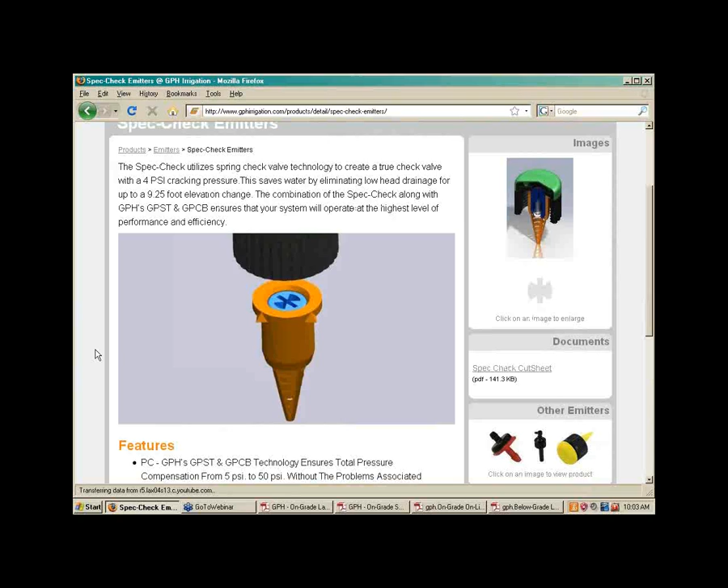We have a new product that we introduced a couple months ago. It is actually the same emitter, but with a check valve built into it, and it's actually a true spring check valve, and it has a 4 psi cracking pressure, so it'll maintain 4 psi in your line at all times. And this has a couple benefits.

The first benefit is it eliminates back siphoning into your line, which is the number one reason that emitters clog. It isn't necessarily the water quality as much as it is any debris or dirt that actually gets sucked back into the line and then finds its way to the emitter control element and ends up clogging it there.

So that's the first benefit of the checking system, but also it saves a ton of water. It actually eliminates the loss of water to low head drainage. It's kind of one of those things where as irrigation managers, we're not necessarily concerning ourselves with how much water it takes to fill a system before we start using that water for irrigation.

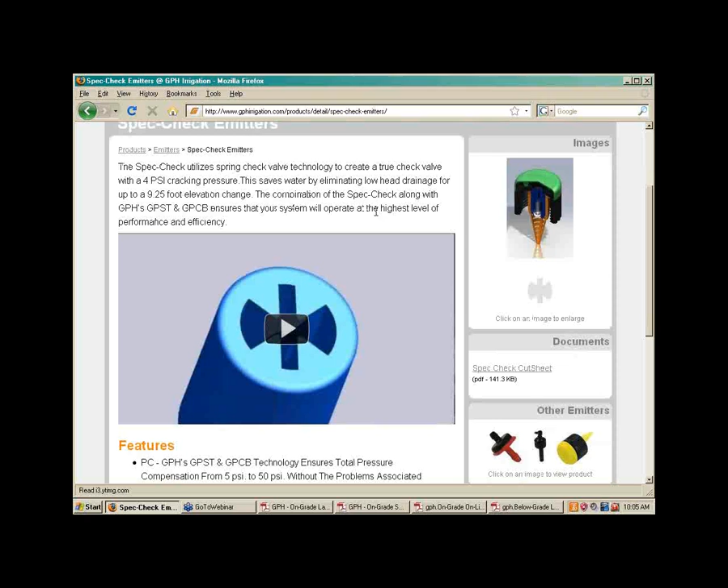And it's significant, especially in commercial applications. It's difficult to put a quantity on an average system, but it's 10 to 20 gallons on a small commercial system, and even more obviously on larger systems. So it is a significant amount of water on every single cycle that's saved.

Another product that we're really known for is our flexible PVC hose and tubing. This is a really heavy wall product. It solvent welds just like regular PVC pipe, so it doesn't require any special fittings. It's available in 1/2 inch, 3/4 inch, and 1 inch standard Schedule 40, Schedule 80 fittings. The only difference is we recommend using IPS 795 solvent cement, and as far as the welding techniques, they're identical to standard welding techniques.

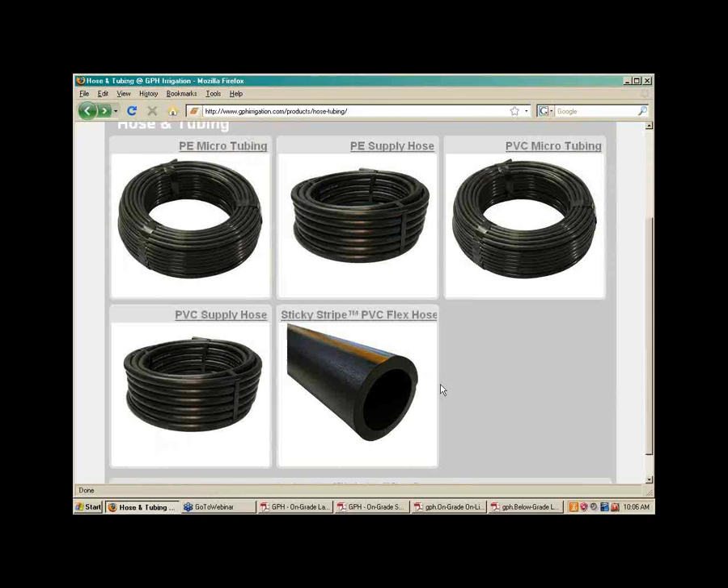We have a brand new product we just came out with, we call it our sticky stripe, and in the picture it's a little bit difficult to see. I'll enlarge it here, but this orange stripe is actually a high viscosity PVC, so it actually acts as a catalyst when solvent is applied to speed up the solvent breakdown of the plastic before it's introduced to the fitting, so it provides a much better weld.

In a perfect welding situation where the installing contractor uses just the right amount of primer, the temperature is perfect, and his welding techniques are perfect, it's gonna provide an equally strong weld.

But anytime one of those variables changes, where maybe it's a little bit colder than the solvent's recommended use, the lack of primer, or maybe the solvent is a little bit congealed and older than it should be, the sticky stripe is really going to ensure a proper weld.

Of course we don't recommend installing the product that way, but in the real world we found that it's pretty common where guys with 20 years of experience are still kind of trying to cut corners sometimes in the gluing process.

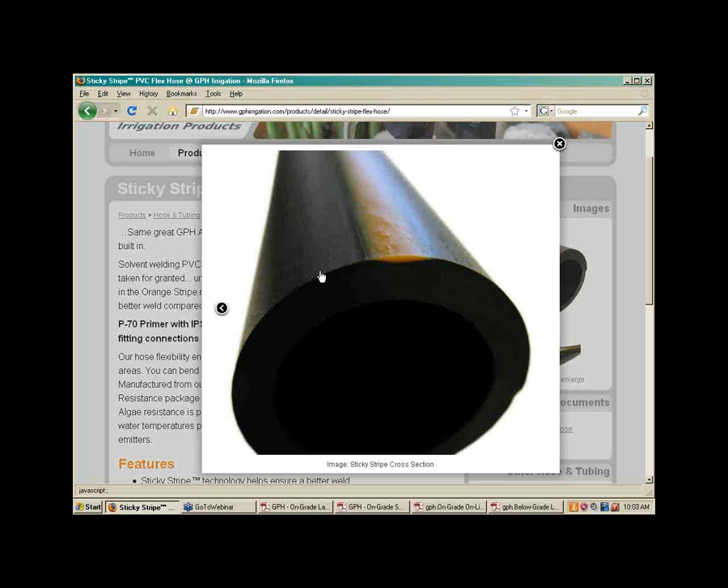Here's another picture of the actual stripe, and they're 180 degrees from each other. So with the twisting action, it does kind of wipe that catalyst around the whole diameter, or circumference, of the hose.

We do manufacture a full line of drip products, so we have stream bubblers, high flow bubblers, and the micro bubblers as we call them, with the half inch thread, also available with the check valve. We have standard emitters, which we call single outlet emitters.

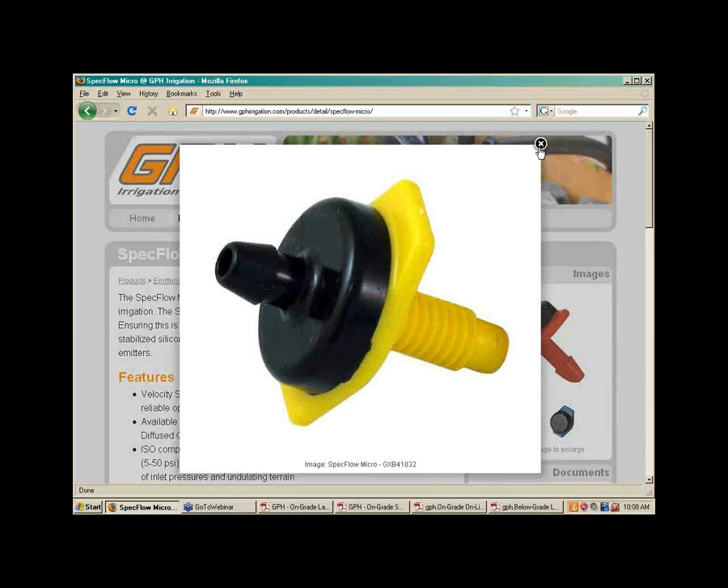We offer these in a few different configurations. We have them with a micro threaded inlet, so you could install them on rigid PVC pipe or high density polyethylene pipe. We also have them designed with a diffuser cap, so if you want to put these right at the plant's root zone, it helps eliminate some back siphoning, but also keeps bugs from crawling into it.

A unique feature about our products is that all of our emitters are available in camouflage, which kind of sounds a little gimmicky, but in high-profile projects we found that quite a few architects and irrigation designers like the ability to have the product above grade and still have it blend in nicely with the landscape.

We offer them in a desert camo and a mulch camo. The desert camo is matched with a kind of desert gold rock that's really popular in the Southwest, even down to the little silver sparkles that are in the rock.

And then our mulch camo, pretty much straightforward there, it matches regular mulch ground cover. Again, the camo colors are available in all of our emitters and bubblers. That's unique to our product line.

We do manufacture standard polyethylene style hose that is pretty common to regular drip applications. Our prices in the marketplace tend to be a hair lower than the Rain Bird and Toro Netafim offerings, but we are specifically focused on landscape irrigation, and really the focus of the company is on quality.

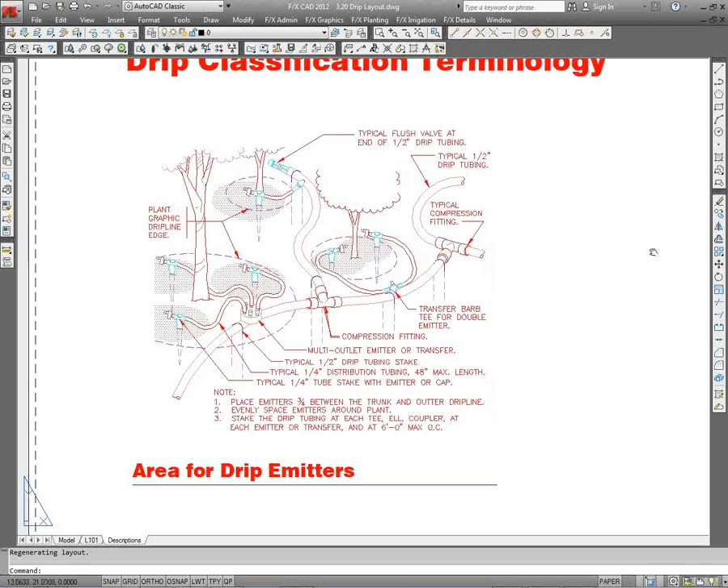What this is basically showing is I've got this above grade stuff. It does have staking — here's what the staking is, here's typically how I'm putting these emitters. In other words, in this little example, the emitters are on little stakes of some sort.

That is what we call area for drip emitters.

Another way to do drip emitters is individual emitters. Commonly in the desert, Palm Desert, Vegas, that sort of thing, the sun would eat up alive any above-grade stuff, so you hard pipe. This case it's showing some flexible riser with an emitter at the end of it. However, the hard piped version Travis was showing would be, in my mind, a way better solution, because while some people use this little flexible pipe, I think bad little children could come along and really whack them up and cause damage.

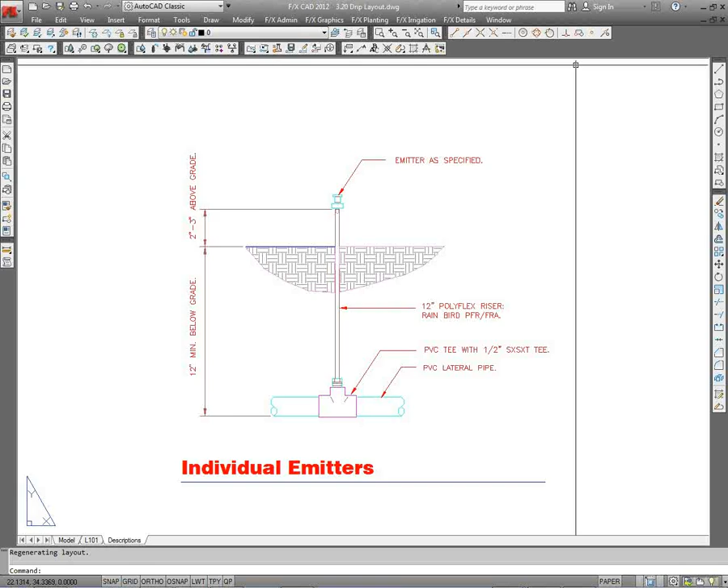A hard pipe would be a much more Cadillac kind of system, and the hard piping does appeal to me. So that's another way, individual emitters, where you're going to see a symbol for every single emitter, and I'll add some of those in because you can mix these up. It could be that you have an area for emitters, but within that area you specifically want to show some individual emitters, and maybe even pipe them separately, or not pipe them separately, but this is a different way to show it.

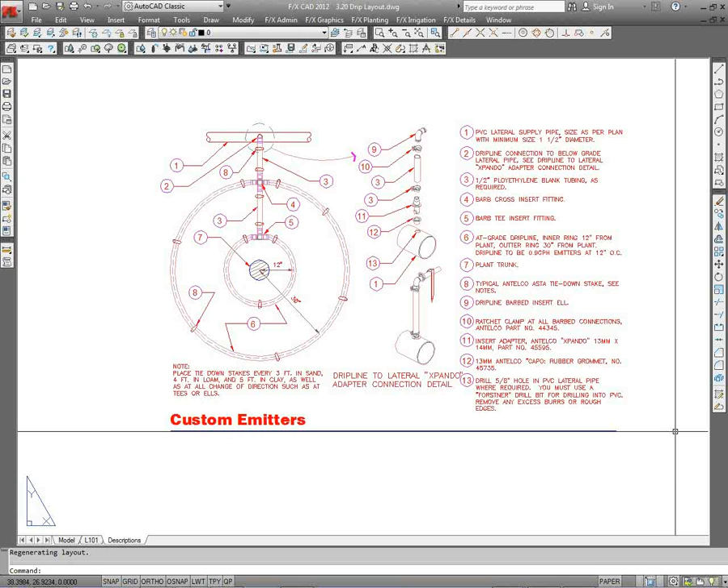So if you add a custom, you assign how much GPH you expect from it. I think you would associate it with a detail, which would be your custom detail like this, and it will give it a unique symbol. So you can use custom.

So we have area for drip emitters, we have individual emitters, we have individual custom emitters, and then the last thing we have is drip line, which is very different than individual emitters. There's built-in emitters along the line, and you space those uniformly within the project.

Other things I'm going to be adding here, just to keep our terminology squared away: a drip control valve, which is, in my mind, really kind of like a kit. It's a combination of valve, filter, and pressure regulator all in one, and we call that a drip valve kit. We do not allow or have built into our system the option to say, I want this particular valve, this particular filter, and this particular pressure regulator—it gets wildly complex.

However, if you have a drip system with really a large amount of volume, and you want a bigger valve that simply is not offered, that's fine. Go to regular remote control valves and add, let's say, even a 1.5 inch valve, and you just add it and then edit its description to say it's going to have this filter and this pressure regulator.

So you can transcend above—I'm going to add a GPH filter and pressure regulator, but since they don't make the valve, it's going to have a valve that they recommend could go with it. Or you can add from another manufacturer, this kit basically here.

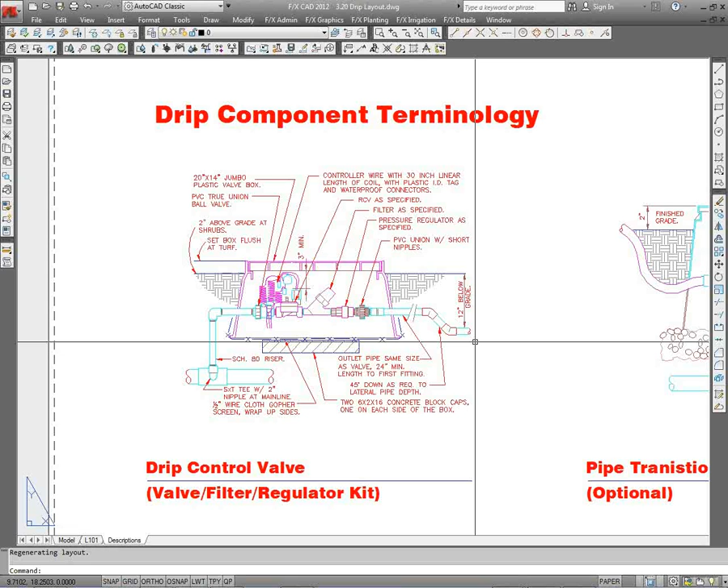But you see this pipe is leaving the valve below grade—it doesn't necessarily have to. I think that's kind of typical because you have a valve and your planted areas are not always conveniently right there where the valve is. There could be individual planters off to the side, could be islands in places. So typically I find it more convenient to leave that valve underground and then pop up occasionally.

And what I call transition to above-grade piping—there's a couple of ways you can do a transition. We call this a pipe transition point. You can show these with Land F/X or not, that's your choice. I like showing them because this first one here is kind of expensive.

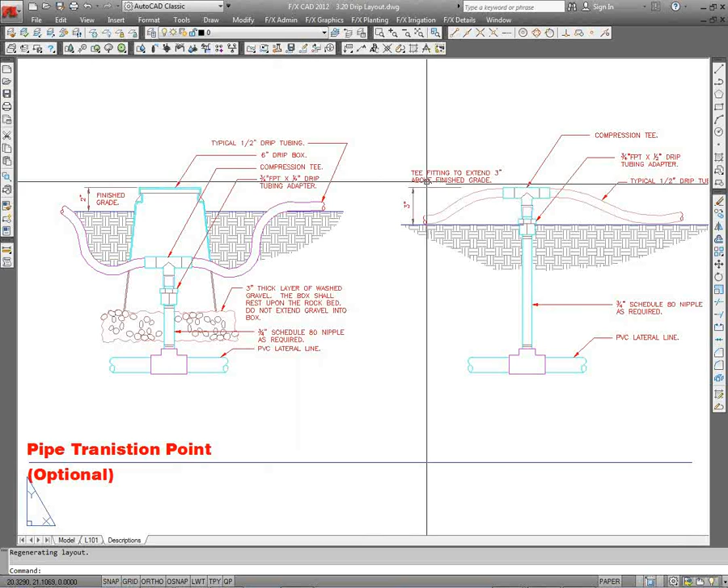It's in a box, it has some gravel. The idea is that if these bad little children come along and destroy the irrigation, they're only destroying the amount that leads to this one leg right here, hopefully, before somebody chases them off. So the maintenance people can go back to this location and rebuild it without having to rebuild everything.

So I tend to show them where I want them, maybe 30 or 40 feet apart, something like that. But you don't have to. Just to keep that terminology in, we call that a pipe transition point.

Somewhere, somehow, there's a flush valve at the end of a drip thing, so you can open it up and flush out the debris. That's your choice. You can add a flush valve and get a symbol for it and place them on the drawing where you think is most appropriate, so you're assured they're going to be in the system.

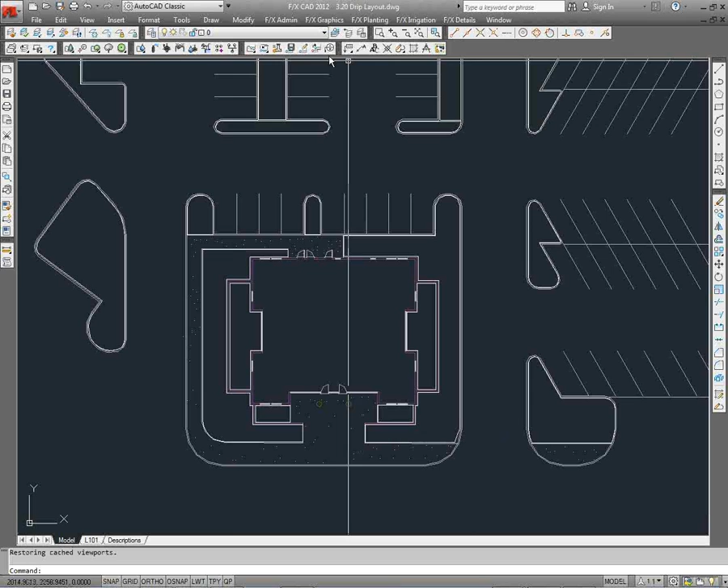A drip air relief valve is probably not necessary unless you're using drip line, and some drip line that's above grade doesn't need an air relief valve, but that's part of the terminology.

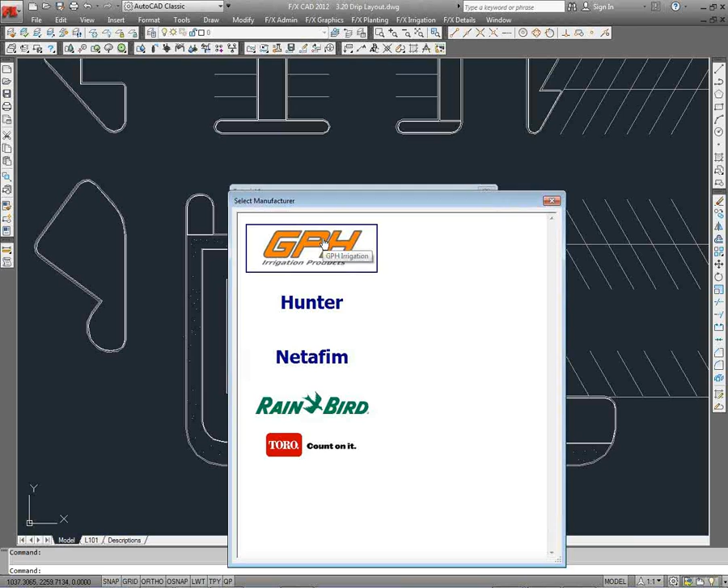So let's add some of this product in there. I've started a project, I'm going to go to the manager for irrigation for that project and go over to drip. I've added one thing so far, that pipe transition point. I just went to that category, and let's look at the categories. Here's pipe transition point, but you can add a control valve or any one of these things.

So let's add a control valve. I'll go ahead and say add. There's GPH and other manufacturers that have control valves for drip. They actually have a couple going on here, but they're not really valves - it's really using the GPH filter and pressure regulator with a valve.

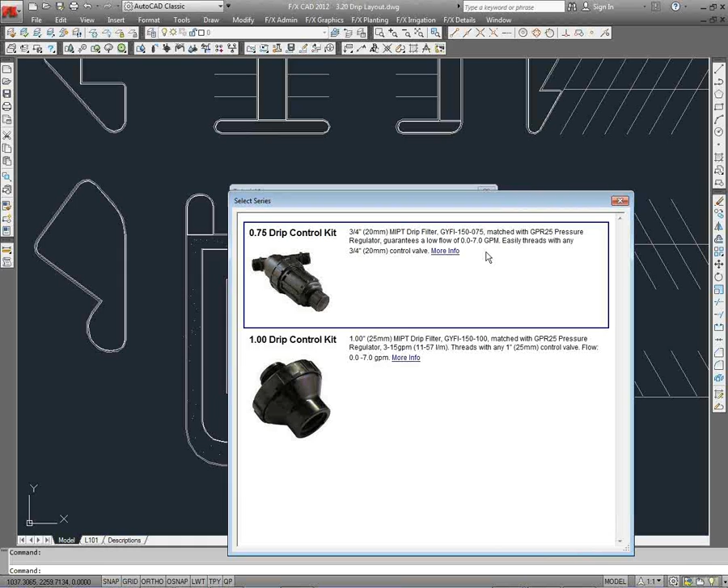I'm going to go to this 3/4 inch just to see. Well, let me go back for a second and add that again. Now you can see it's from 0 to 7 GPM, which is the flow range. Anytime, anywhere we're listing a drip control valve, we like indicating what the manufacturer indicates as the flow range. It's not really the valve, it's the other equipment attached to the valve that might have this limitation, so it reminds you of the flow range in there.

I know we were tinkering with this yesterday in its description, but GPH doesn't make a control valve, so they recommended the Irritrol 700 or the Rain Bird 75 DV. So we're putting in one of those products with the GPH filter and pressure regulator. I'll pick the Rain Bird. Say add it - so I've added the drip control valve.

Now let me go add another product. We've added the transition point, and you can add a flush valve. I'm going to pretend we did, sort of - I'll just beat through there.

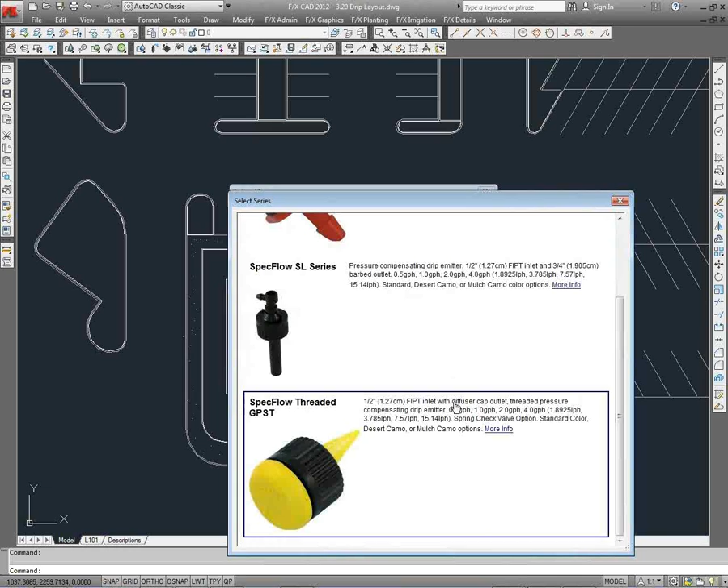Now let's add an individual emitter, and this individual emitter is going to have its own symbol. And maybe you don't even want those - you really want this area for drip emitters, but I'm going to add both of those in. So let's add an individual drip emitter. I'm going to go over to GPH here, and they have a variety of types, and the one that intrigued me as Travis was talking was this guy right here. So I'm going to click on that - that's got a 1/2-inch FIPT.

It's also got, as he was showing the images, this check valve, which I always love because you know life is on undulating terrain, and if you have even a 3 or 4 foot distance in a planted area, when the valve shuts off, all the water in the system is going to go down to the low valves and flow out. That's bad for wasting water - nobody likes to waste water. It's also bad because when the system fires up again, there's air in the system, so there's an impact on it, and your system's going to more or less wear out if you do that. So check valves are really cool.

And there's my Desert Camo color. So I'm going to add that guy in, give it a design pressure - I'm going to say whatever you want, 20, 30.

Don't, just because 40 is available, or 50 or 60, which aren't on this - you can see what's available, 10 to 40 - doesn't mean go to the highest one. It means that's what I'm expecting that valve to produce.

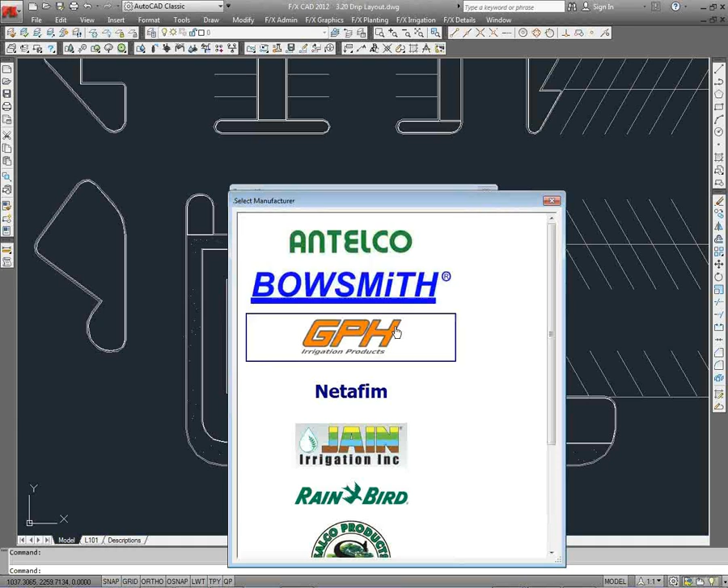I like the idea of that 4 GPH option on there. So that's how you add a drip emitter - you just go and add the emitter, and we get an individual symbol for that. You can place it a couple of ways. I'm going to go to add, for this last thing, an area for drip emitters.

Remember, this is going to be a mass area - I'm not going to show all the emitters, just the mass area, but I'll show you how it figures out what the flow is. Again, I'm going to go to GPH, and this time, just for the heck of it, I'm going to pick this guy right here and see what the options are. The option I want is this 10-32 thread.

It's really fine micro thread. It can thread into this sort of 1/4-inch spaghetti tubing that may come out of the main 1/2-inch tubing. Plus maybe it's staked - often I'll stake that little spaghetti tubing and just keep it a fairly short length. I'm not crazy about the spaghetti tubing, but sometimes you have to use it.

What I do like are these stakes that you can now screw this onto. So I'm going to go for this 10-32, and I'm going to go for the Desert Camo. I'm looking over all the different options here. You know what else I want? I want this diffuser cap.

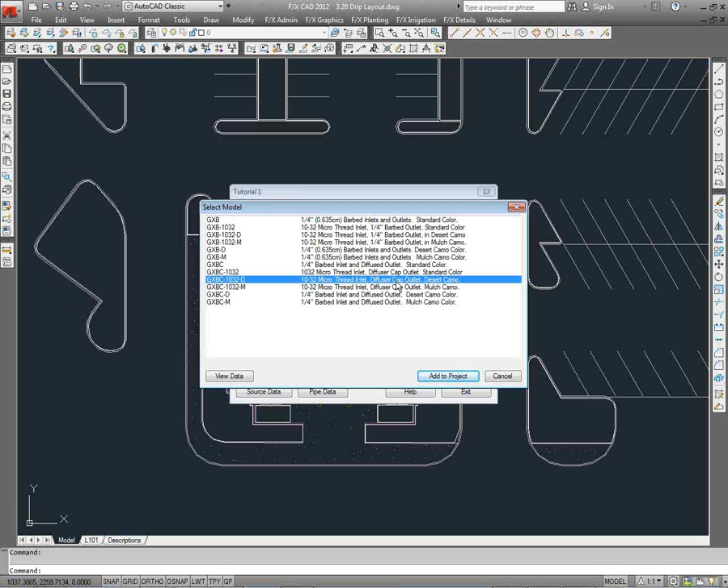I know Travis mentioned that's good, to diffuse it and keep bugs from crawling in there. I think it's really important, especially if you're using that 4 GPH. 4 GPH is not a huge amount of water, but it's pretty good, and I like the idea of diffusing it, and I really like keeping the bugs out myself. So I'm going to go with this one - this 10-32 micro thread, a diffuser cap, and Desert Camo.

And I'll add that to my project and give it a design pressure, the minimum pressure I want to get. Now here's what's different about adding an area for drip emitters versus individual emitters - on my project I've got plants too, of different container sizes, and I'm going to be assigning what kind of emitter and how many I want to each container size.

Now, it very well could be you end up looking just like this - I've got 1 gallon through 15 gallon B&B, which is a palm tree and all this stuff, but only the 1 gallons are getting drip. That's fine, just go to the 1 gallon, because I'm not putting drip to the flats, period. I personally don't - I would use drip line or some other system to irrigate flatted ground cover, but certainly for 1 gallons, what is it going to be?

And I can expand this list of emitter type, and it says a half through a 4. Well, I'm going to go to a half. Now, you've got to have a number.

If you don't have a number, it's going to be 0, and as we all know, 0 times anything is 0, so it's not going to show any flow. All of them are 0 right off the bat.

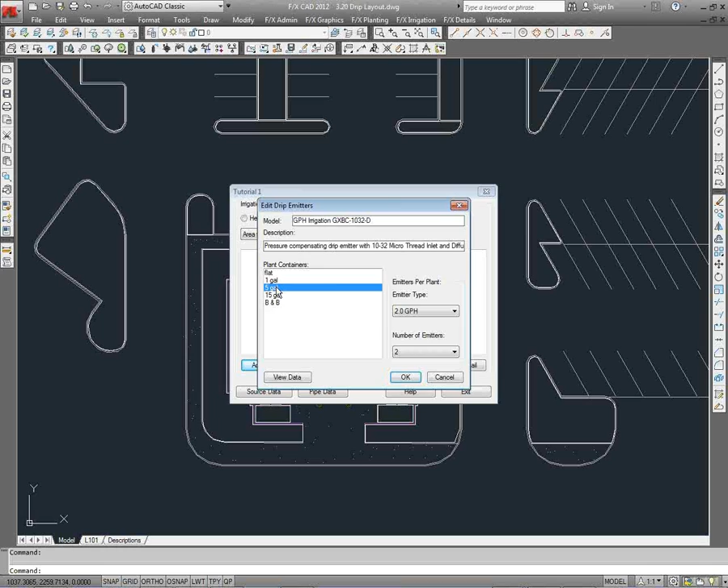That may be all I do. The rest of these are all going to get 0, so they won't be counted in. I've got my plants in here, and I'll show you that. In this case, I'm going to give it the 5 gallon, and just to bump up my flow, give it 2 GPH and 2 emitters. A 15 gallon, I'll give 4 GPH and let's say 4 emitters, something like that. I'm not really thinking carefully about what the combination is.

Obviously I'm going to run this valve for a certain period of time, and I want to make sure all the plants are getting the amount of water they should, so I've got to think this out a little better, and frankly I'm not — I'm just randomly doing this. But that's what they're going to get. Each plant container size is going to get what I'm indicating here.

So I say okay, and I've added that particular area for drip emitters, and we're pretty much done. We've added a control valve. If you wanted a transition point, go ahead. If you want individual emitters shown, there's a couple of ways to do it, go ahead, and then area for drip emitters. I've added all that stuff to my project.

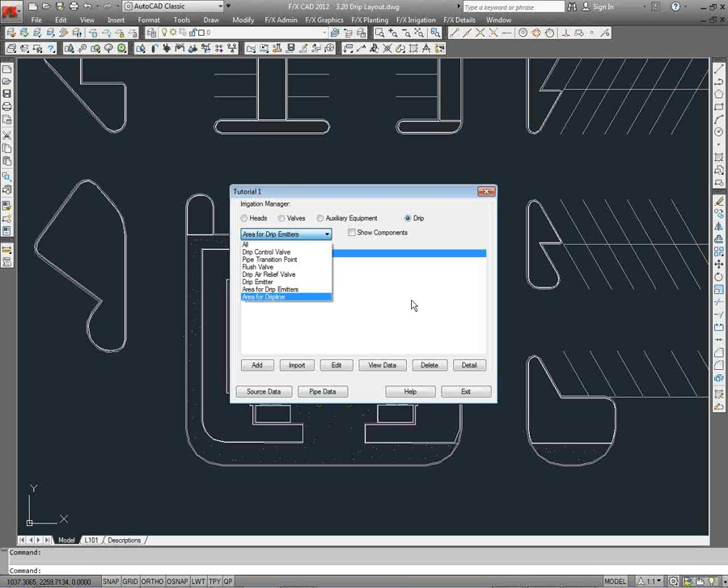Now let me put it into my drawing, and let me show you on this drawing what this is. I'm going to turn on a layer state. This is an external reference of the planting plan. You don't have to make it an external reference, but it's smart — the planting plan on a fresh drawing is the external reference for the base of the irrigation.

What that external reference gives you is, if you make changes to the original planting plan — add, delete plants, that sort of thing — when you load up the irrigation plan, since that is the reference for it, any changes will be reflected in here. But it's not directly in the drawing, it's in the external reference. That's good in our mind.

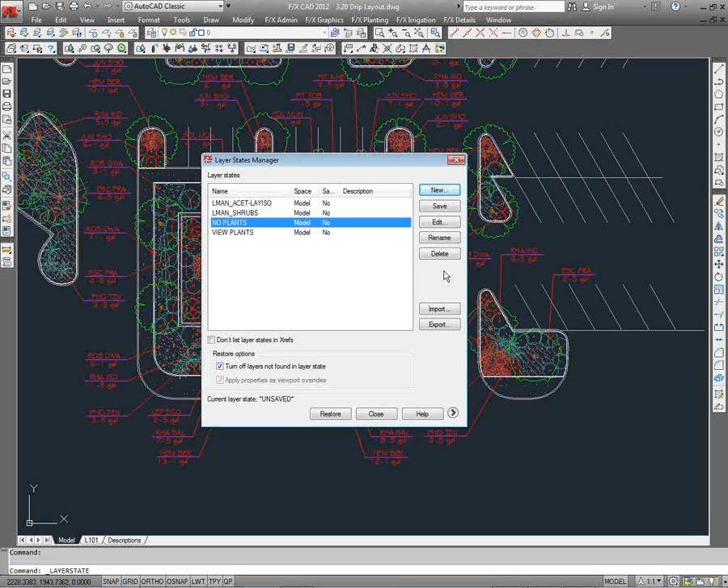All you do here is just start freezing layers until you get what you want — at least that's what I would do — or you could gray out the plants from layer control. I tend to simply freeze them; they're gone. But the thing about that external reference is the site was in as a reference to the planting plan, so the site is still here. I just can't see it. You can turn off layers or freeze them, and it's easier for me to freeze because I click on a tree and all the trees go away, a shrub, a label, and in about 8 seconds I end up with this.

But I have defined these areas with a polyline on any layer that I want. So now let me put some of these things in there. What I'm going to click on is placing

head/emitter. It's both — it used to be different in our system. That's how we do drip now, because an emitter really is technically a head. I get a floating toolbar — the first half of it is for spray heads, other types of heads right in here such as rotors and bubblers and that sort of thing. And right there is drip.

Now the first one is area for drip emitters, so I click on that. There's my GPH with that one. And by the way, you could have multiple of these — you don't have to have just one type. So there's my GPH, I say place, and I get a pick box.

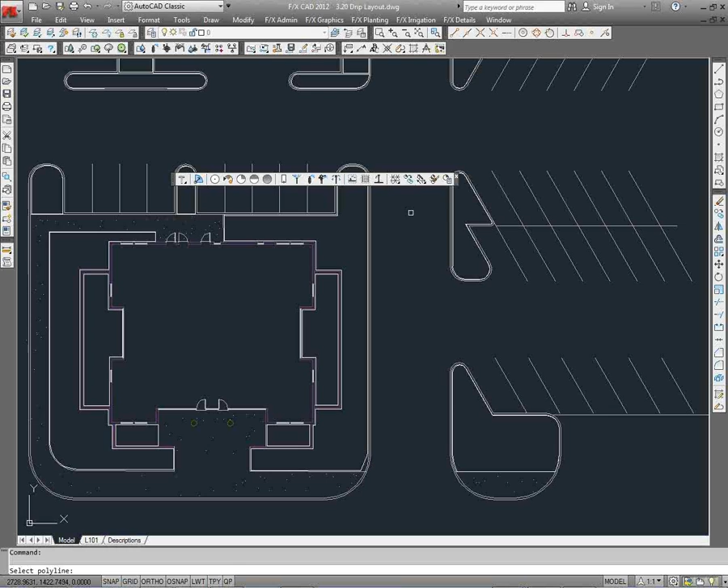I click on one of these bounding lines, and it gets converted to a particular layer that is dashed. It's going to print halftone, but fairly thick. Then it fills it with a hatch pattern to let you know what the area is, but that hatch pattern is halftone. So if you draw pipes in there, they're going to pop out and stand out.

And I'm picking up all the plants in there from the XREF, or if they were within the drawing, from the drawing. So I just go along and click, and there are some individual areas here, and I want to be sure and click on some of these so I can kind of get some gallonage going on here.

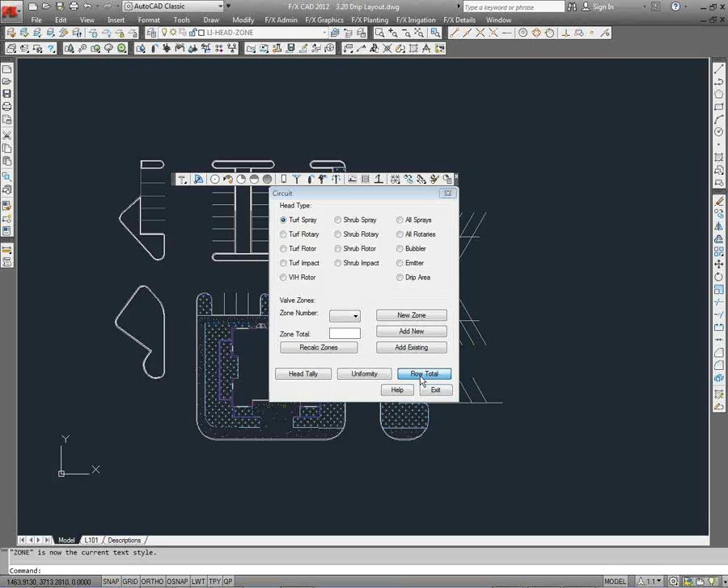By the way, that bounding line could have a polyline with an arc. It could be straight polylines, whatever you need on there. So I'm just going to go along and pick a few of these things here. Let's say that right there is what I'm picking.

So you pick these areas, and then you go to our circuit command and do a flow total. That's this button right down here, because I want to see what I've got for a total flow. I'll drop that in. I have a total flow of 17 GPM.

And remember that valve that we added, whether it was a GPH valve or another valve, had a certain limitation to it. Now that isn't a head—I'm looking at placing heads on here and emitters. So if I want to place a drip valve, there's actually a button over here for drip equipment.

And there's my valve. I'm going to have Katie put the flow in this model description right here. We were just making touches to this yesterday, and that got left out, but after today that flow is going to be in there.

To remind you, that flow is from 0 to 7 GPM. So if it's 7, that means 17 divided by 7, and what is that? Then we'll figure out how many valves we're going to need. Now, 3 valves are going to be necessary for this. I purposely used a lot of water so that we could get a lot of water here. If you used less intensive emitters, in fewer numbers or something like that, you'd get a different flow.

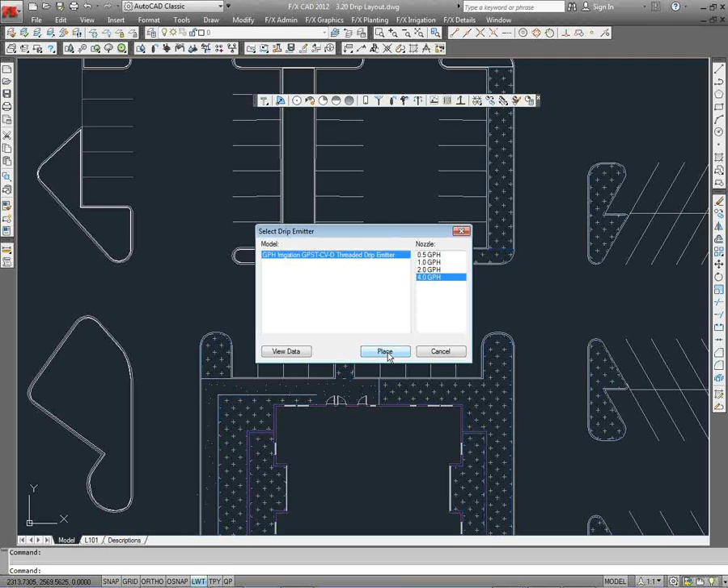If I pick a 2 GPH, I'm getting a different look, so you can mix them up. You can use anything from the half to the 4.

Each one is going to get a different symbol. Let's say I'm going to hard pipe to there, and I'll show you another thing after I size this particular system. So let me put a valve in.

A valve is not a head or emitter, it's drip equipment. So I'm going to go to there. There's my valve, and I'm going to put one. I'm just saying where it is. I'm going to put it out here, and it's going to pick up that area, and I'm going to pick one here, and it's going to pick up this particular area.

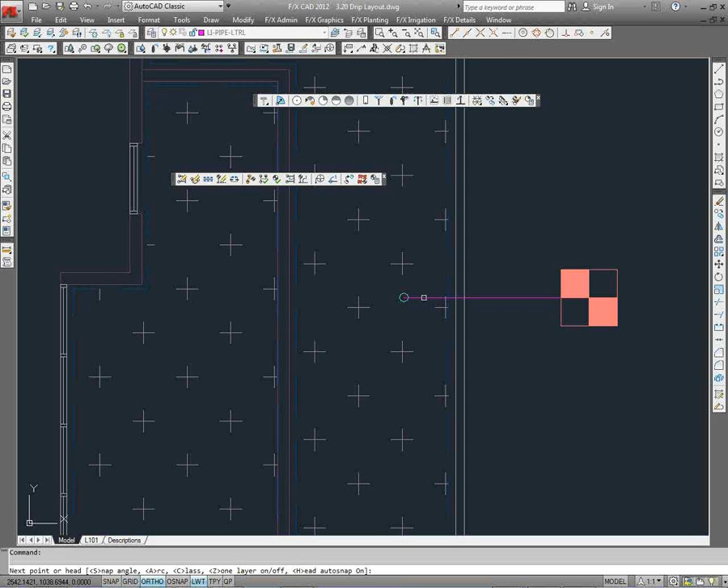So to connect this valve to these, I have one of two ways I can connect it. It's piping, so I have to go to our piping function right here and click on draw pipe, and I'm going to click on this, and it lights up. Then all I have to do is pipe into an area. Now I can still use our piping.

We have various tools like highlight station, and if I do highlight station and click up, you can see I've picked up that particular area.

But I have other areas to also pick up, and the way I would do it is I wouldn't go from here, because if I continue from here and go into this next area, we won't know that your intention is to stop off and feed this area.

So what you have to do, if you want to do that, is maybe back up a little bit and then go into that area, and then go from there. You can back up and then go into this area. Now let me do highlight station, and what I've picked up are all of those particular areas.

Another thing you can do, if you wish, is go to this drip equipment and put transition points in. So we get this target because I want to know how many feet away from this transition point, just to kind of keep you attuned to scale.

This is a temporary thing. If I were putting in this kind of U-shaped area here, I might put one up here and one down there, and I'll just get rid of this piping here, pretend I didn't have it, if I'm using pipe transition points, and you don't have to. And I'm going to put some pipe transition points.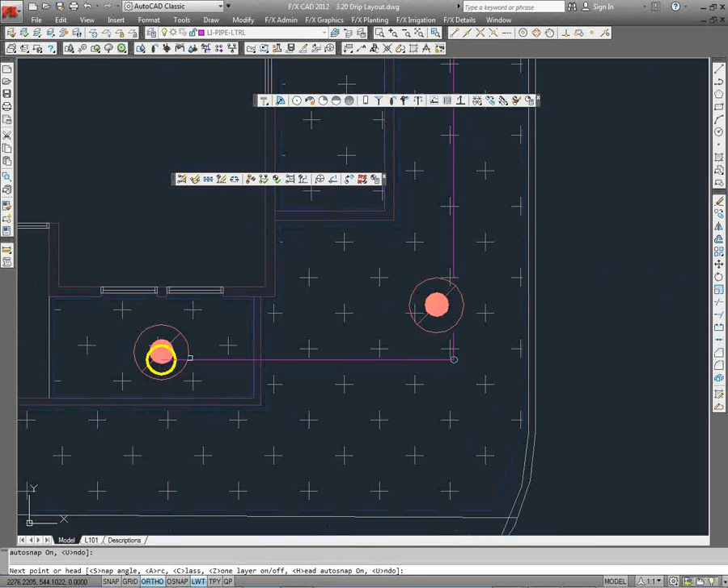This little planted area, this is actually a wall around here. This is very separate, so I would put one in there. This is the same thing, it's totally isolated from the others. I have to put one in there, and of course any island I would have to put one in there.

And again, you don't have to use these, you can just pipe into them. But if you want to tell the contractor what your thoughts are exactly, you could use them.

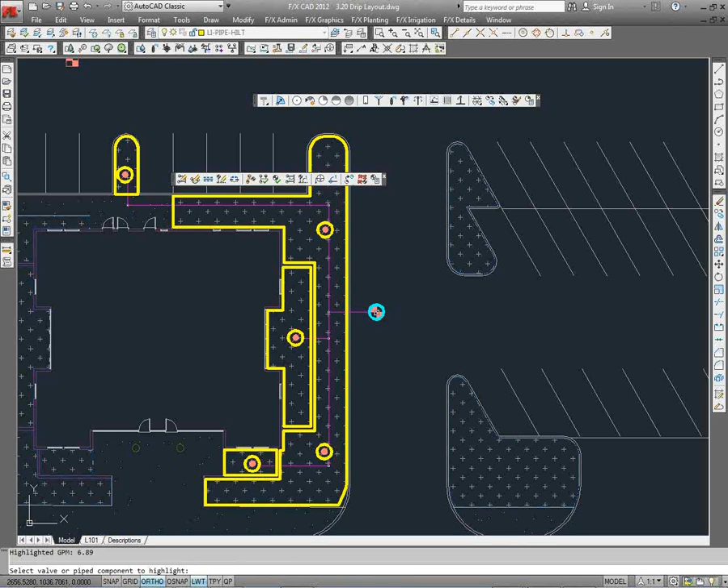If I did use them, what I would do is just like I'm piping the heads, you can see I picked that up, and then they turn yellow when you pick them up. And then, of course, if you're going to a fitting, it will be green. And if I went to a pipe, it would be a different color, magenta. But I can tell I'm picking them, magenta like that. So it's kind of telling you.

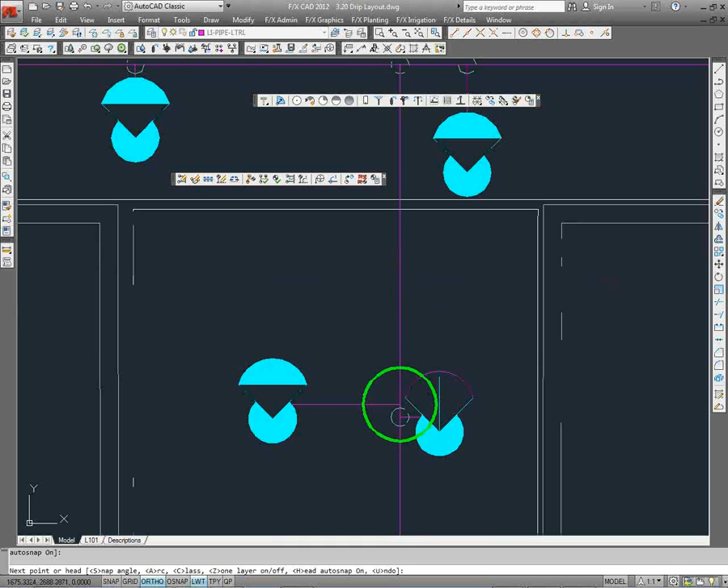And then always use this little function called highlight station, and that's going to highlight what it's connected to, just to assure you, did I do that correctly? Of course, these individual emitters, all I'm doing, in fact, I think what I would do is probably just run one line all the way down, and then just start breaking it off in some fashion and piping it into there however I wish.

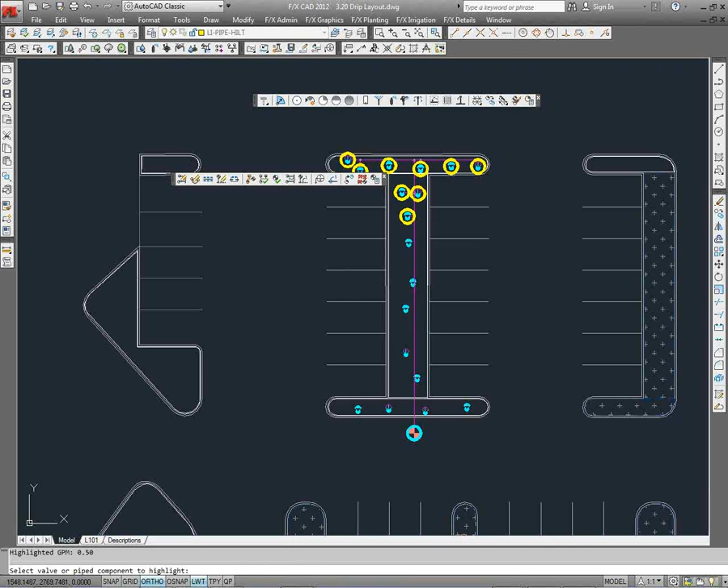Something like that, but I have to go to each individual head. If I'm hard piping to each individual head, that makes sense, but you can tell what's going on, because yellow means I'm hitting a head, and the color cyan means I'm hitting a pipe, or green means I'm hitting a fitting, that kind of thing.

So I hard pipe to all of those. Again, I would use this highlight station function to highlight what heads I've hit, which shows me what heads I haven't hit too.

So I forgot to hit these, so I would get those in there. Now if I size this, I'm just going to go to size lateral. I can pick a valve, or I can right-click for all. I think I'll just right-click for all on there. And I want to label these valves.

I just kind of want to see what the particular flows are that I have. This one's not going to be very much, it's only a half, I hardly picked up any heads on there. But that's a half GPM. When we were looking at these, we said, oh, is it a half, a 1, a 2, or a 4 GPH? We've already converted that to GPM, because on a valve you want to know the flow in relation to its GPM to keep it standard with the rest of the system. But as you're placing it, you're thinking GPH. So I have 6.89 going in here.

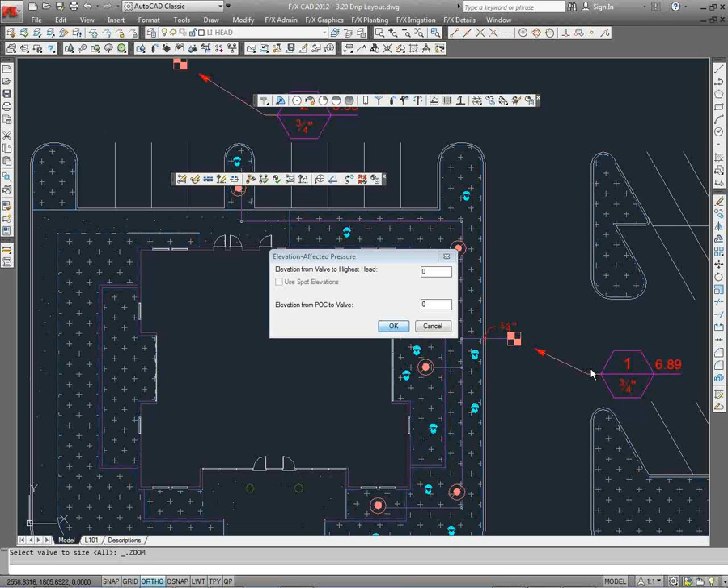Now, what you can do if you wish, you can place these individual emitters, the ones I put up that were hard piped. I'm going to pick a 4 GPH, and place some of those within this. Now, they are not hard piped, or they are - if I hard pipe to them, maybe I'm hard piping from a different valve, and this system would not know they're there, this system of this valve. If I hard pipe those individual emitters to another valve, they're separate. Or if I just drop them in here wherever I want them, there's individual special trees or something going on, they're going to be picked up within this whole area.

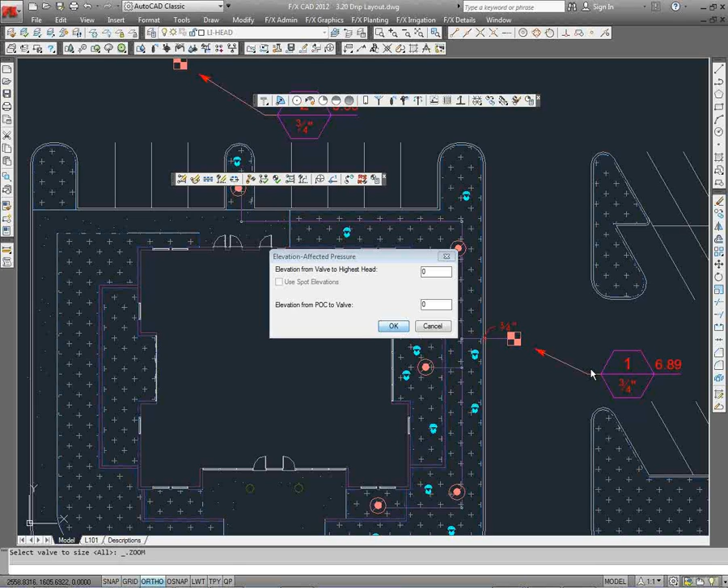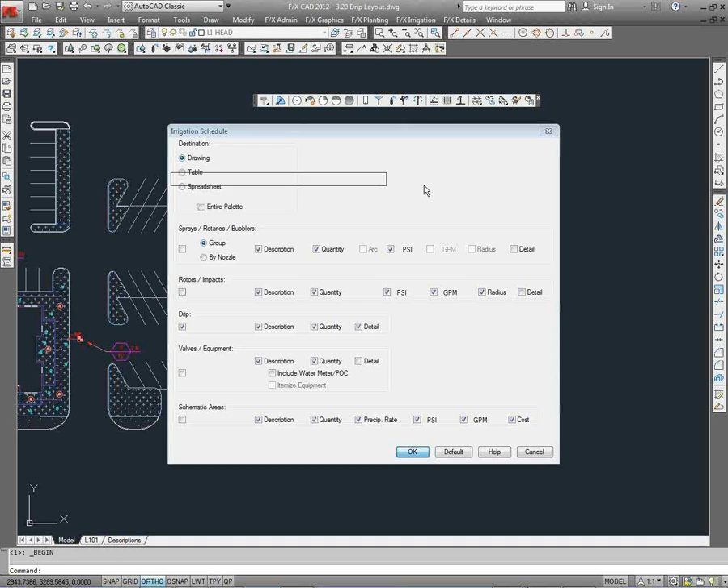This drip tubing that's running all over is also going to pick those up, because what I'm going to do now is size this particular valve, and now it changed to 7.8. So this is picking up two different things. It's picking up the area for drip emitters, looking at the plants, assigning a number of emitters of a certain type to it, and it's picking up any individual emitters I happen to put in there and do not pipe to another system. This can be handy because here's an area, and you got these 4 existing mature trees, and you want to handle them differently with a completely different type of emitter, whatever. Go ahead and they'll be picked up in here, or go ahead and hard pipe to them, and they'll be 2 different systems.

So the only other thing we have left to do is basically run a schedule, and here's drip. What I do so often is I'll uncheck - if I'm doing drip, I'll uncheck everything else. Because the drip schedule I'm going to show you, and I didn't assign details to it, but there could be a detail assigned to those, is actually a pretty big schedule unto itself. If it were just drip, I think I would double-click on this and call the schedule a drip irrigation schedule. You don't necessarily always have to do this. So the title now says drip irrigation schedule.

Maybe I got other kinds of heads. Maybe just for convenience, for the area on my sheet that I have available, I don't want to run an entire schedule because it makes it really massive. So technically you can separate the drip. So what I've got is 2 of these control valves, and this is a description of it. I've got 5 of these pipe transition points, and of course if you assigned a detail to it, it would show up here when you place it into your drawing set.

Here is that threaded emitter that I have here, the individual emitters, so it shows them all here, and it shows you've got the 4 different types on here. There's a total of 31. It doesn't break it down into which ones there are, but you could do that if you ran this to a spreadsheet - it would break it down.

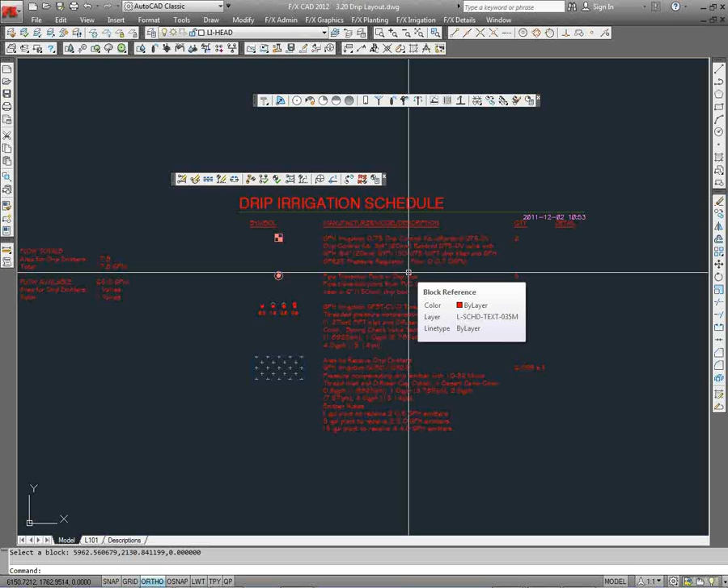This is clear as a bell as to what it's doing, especially if it's coupled with a detail that's appropriate. And it does it in a way that is quick and easy for you. To me, that's the best of all worlds.

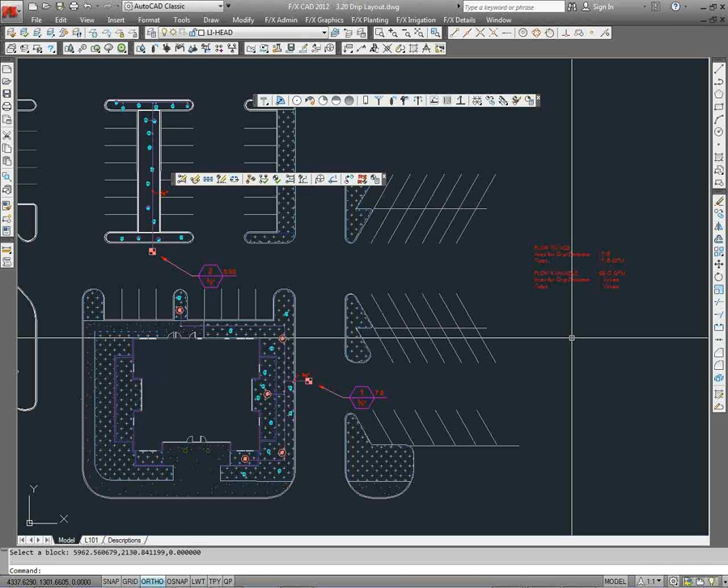And plus, you know, if you avoided the squiggly lines, you could turn off this hatch pattern and say, I want the contractor to do a little transition here, swiggle up like this. They're not going to look carefully at what you've got and put it in exactly like that. They're going to pretty much do it the way that makes sense and is fast to do the job. So I think this really works to do it with the hatch pattern.

So basically that is putting in their particular system. Katie, do we have any questions on this so far?

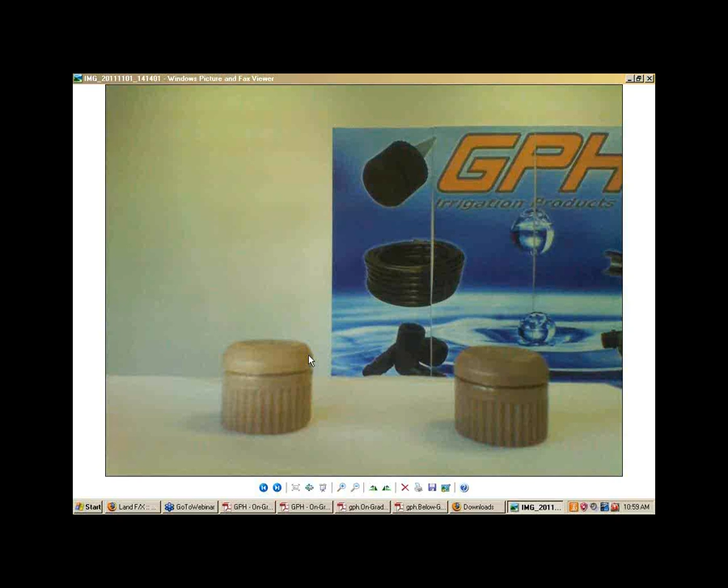That's very good. Do you have anything else to add, Travis, to all of this? I did neglect to mention that all of our half-inch threaded products are Teflon free. We manufacture the emitter screen with self-sealing EPDM material, so the emitters just thread right onto the pipe thread and do not require Teflon tape, which saves some labor for the contractor.

And I know you didn't make a big point of it, but where are these made? I'm sorry, Dave, where are they manufactured? Oh, 100% of our product is manufactured here in Fontana. So we bring in the raw material, the plastic pellets, and ship out emitters and hose.

I like all that in-house a lot. Right here, I like that.